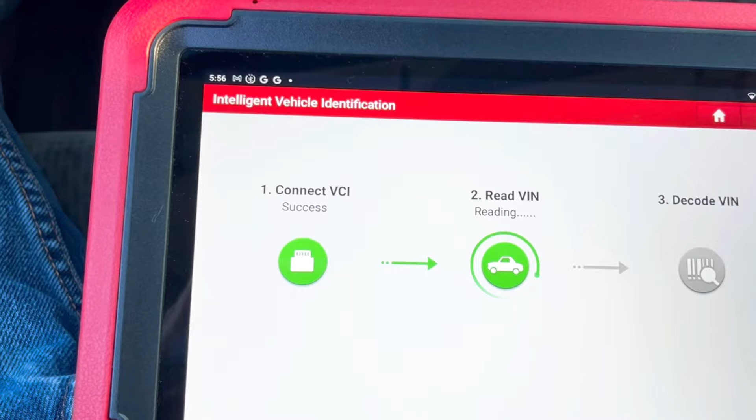Welcome back. I think I got an interesting one here. It's like the end of the day, but it's my neighbor's car, actually they flagged me down. They got a F-150 here, and it's having some drivability issues. So we're just gonna pull some codes real quick. What I have in here is it just randomly started running rough, I guess. I've never seen this car before, I've never worked on it personally.

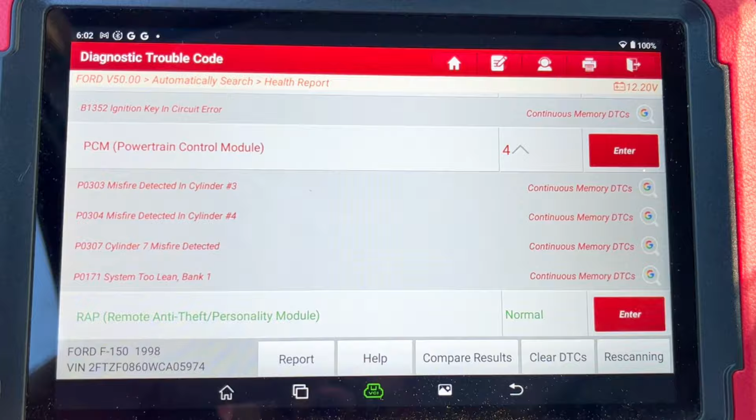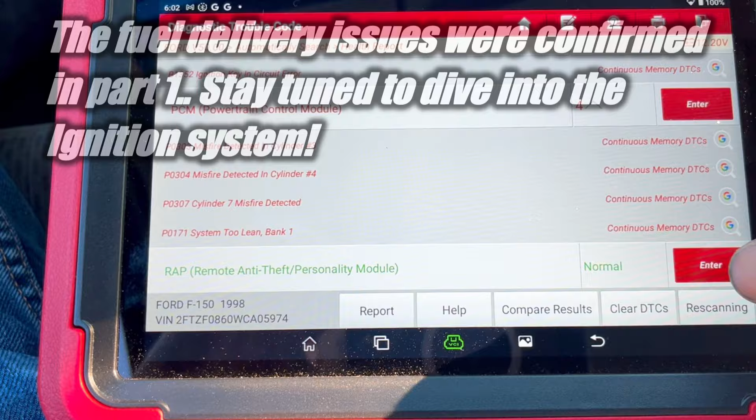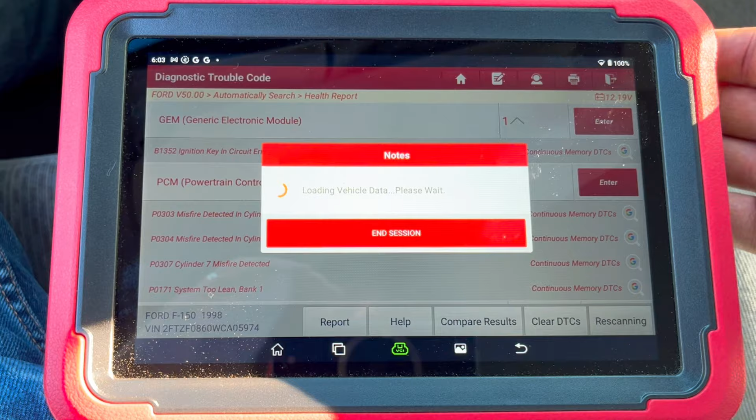Okay, so we got a system lean on bank one, and got misfire codes for 3 cylinders. So that sounds about right with what they were talking about. I think that's the only one. In the gem, there's an ignition key in circuit error, I'm not gonna worry about that right now. But I mean, what it looks like to me is, I don't know, maybe an intake leak on that side, or it's running lean. So I wouldn't put it past it. These engines are known for that.

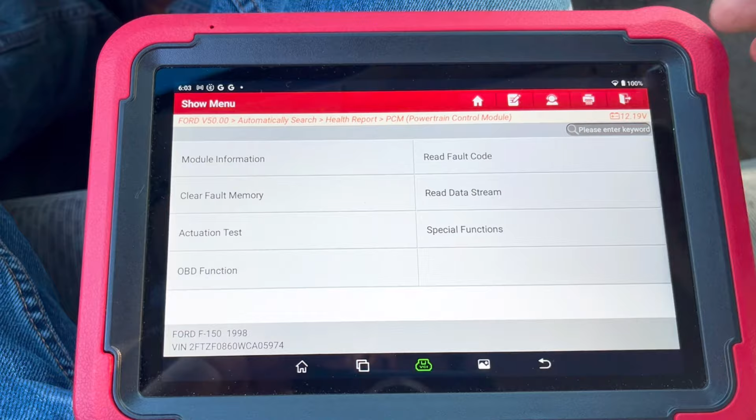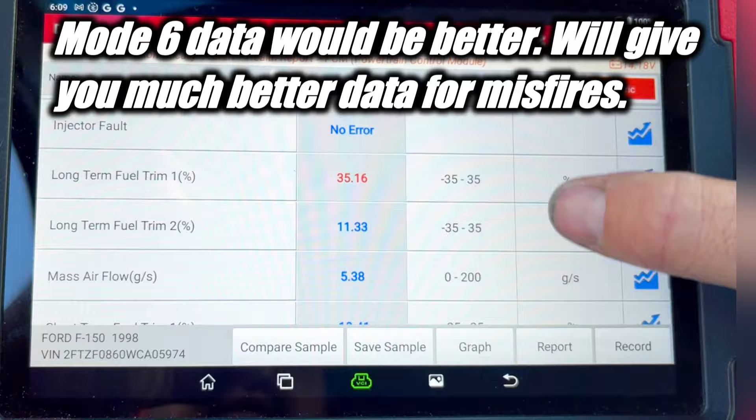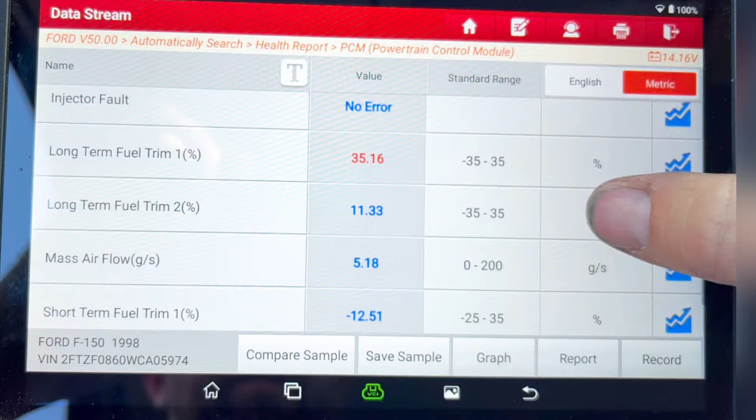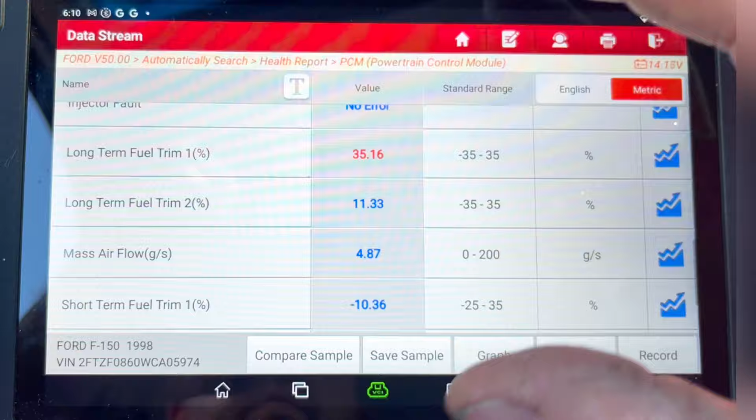So let's go to read the data stream. I just wanted to see the fuel trims, see if any injectors are throwing some type of... I don't think that's a misfire counter. I don't know. Short term on bank one, and then long term on bank one is real bad. So we're pretty lean here. If you want to add the long term and the short term for that bank together, we're riding right around 30, so we're lean. We're real lean on that cylinder, or on that bank. So let's get on this test drive and then see what we can see.

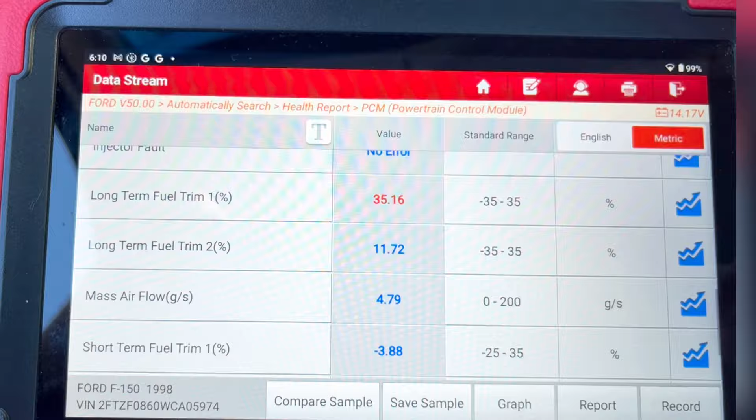So I just got back from that test drive, and that thing runs horrible. I think there's a couple issues going on here. For one, I can smell fuel pretty strong. I'm thinking we might have like an evap leak somewhere, but also we got misfires on those 3 cylinders, and I'm just trying to think, they said it went out all at once. So this particular 4.6 engine, it's got a coil pack on each side of each bank.

I'm thinking one of them failed. So yeah, I think I'm gonna just get a secondary pattern on the coils to see if I got some weak spark coming out of them, and then if everything looks good, I'll move on. But this is a quick dirty check just to verify spark. So let's get on that.

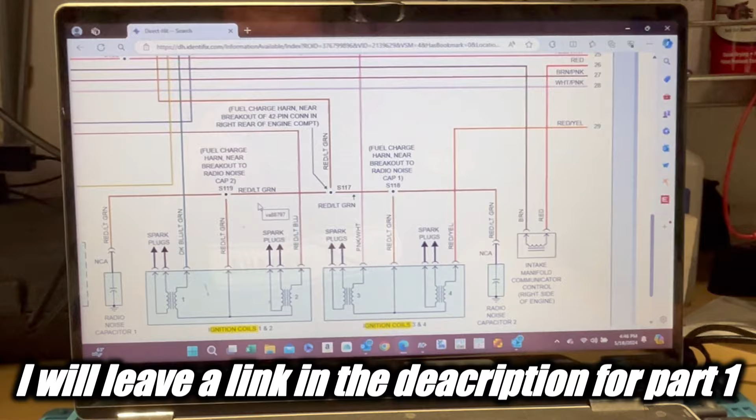Alright, so this is that secondary ignition video I was talking about in my last video. So I just pulled up the diagram, and we got 2 ignition coils here. There's one on each side of the engine, and they're not bank specific. The wires kind of run here and there, from this side of the engine to that side of the engine. We'll get into that in a minute.

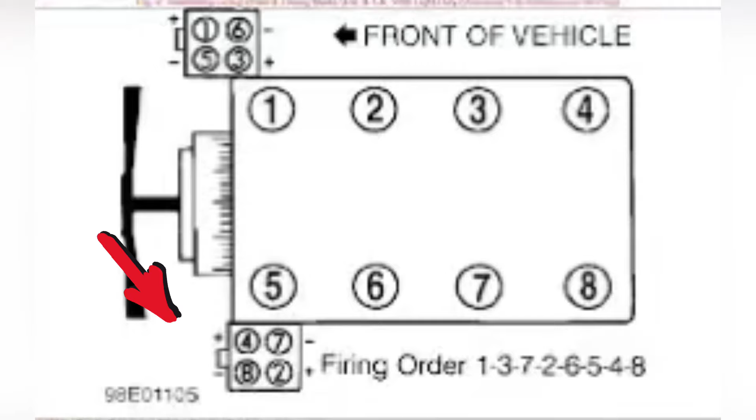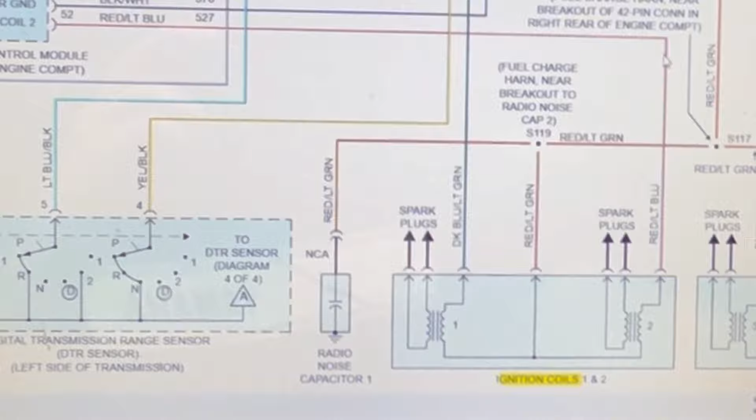So this dark blue, light green wire here, if you follow that up, that's going to go over to ignition coil number 1, that's the control. And then here's for cylinder 2, you're going to have the red, light blue, and it's going to go to ignition coil number 2, and then so on. Same thing with the other side, number 3 and 4, and so on. The pink wire here, pink white goes to control, red yellow goes to control. This red, light green wire right here.

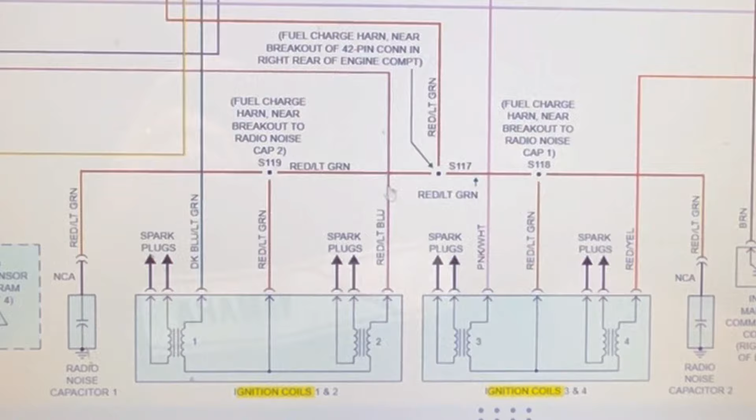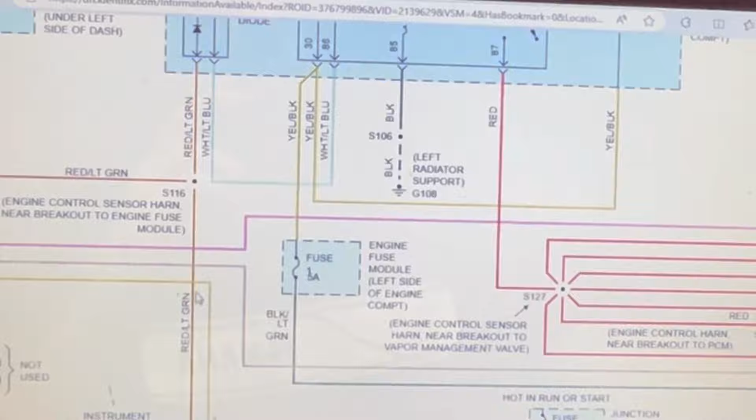It splices in, but if you follow that all the way up, it comes to this fuse number 30, and it's got the PCM power diode on that circuit as well as these radio noise capacitors.

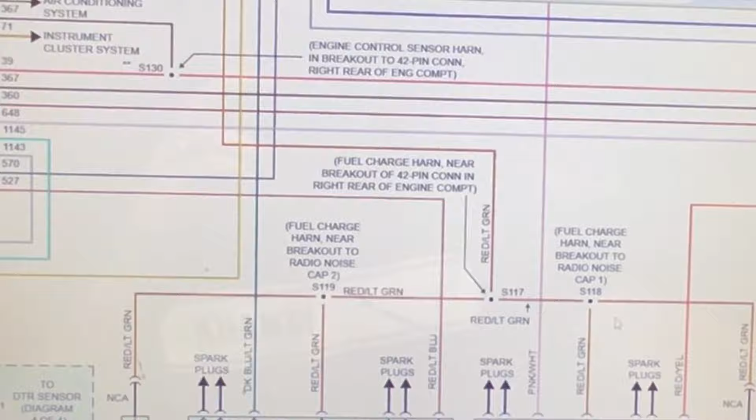I could probably tap into the circuit on either of these. They're pretty exposed, the noise capacitors, but I'm not going to. I want to do as central of a location as possible. You can see it splices off to all these coils. I don't want to be right here, or right here. I want somewhere where I can get a good current ramp, that's just kind of neutral. So somewhere right around this splice point.

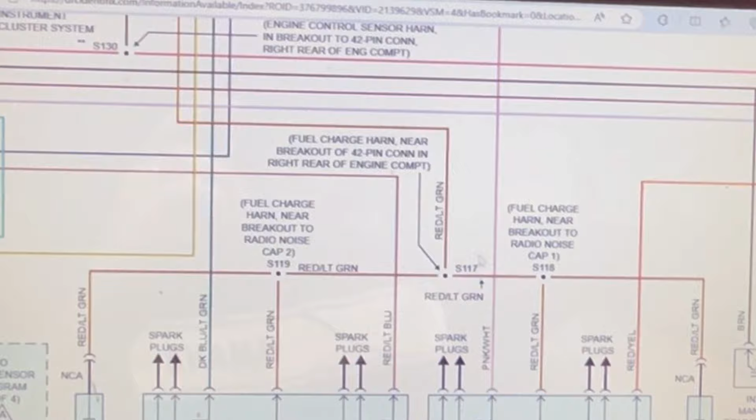This is going to be the right rear of the engine compartment. There's just a big bulkhead connector in there, and I think I saw the wire. We're gonna have to maybe cut open the loom a little bit, but I think we can get a good measurement there.

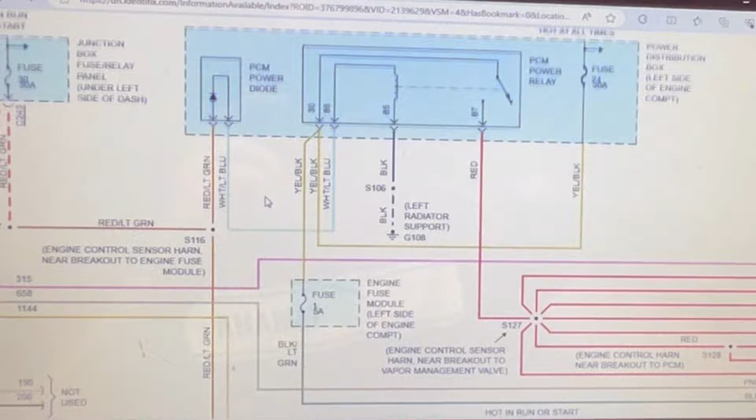I thought about just getting it from this fuse. However, I might try that, that might be the easiest. But there's all this other stuff tied in, like this PCM power diode, and I really wanted something close to the coils so I can get a nice good measurement.

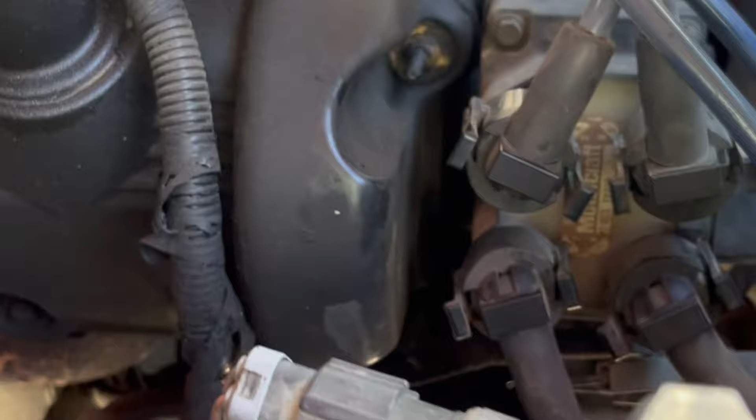So you can see down there, that's one of the coils I was talking about. And then here we go over to the left side here. There's one that's under this air cleaner here. Got a better view over here. Yeah, so you can see it's right under there. Looks just like the other one.

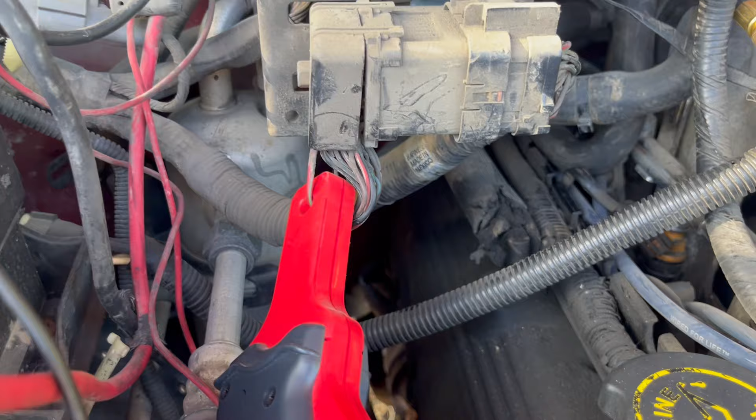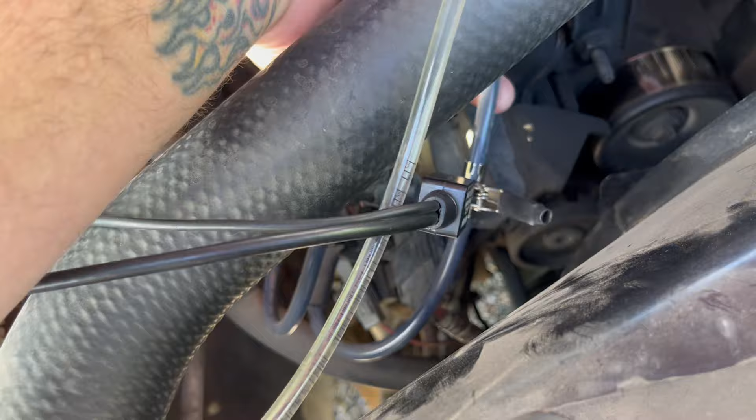Okay, so I just got my current clamp, the low amp clamp, hooked up to the main power feed for these coils. And then I got the secondary hooked up to this number 1 plug wire, and to ground, battery ground.

Okay, so you can see we got some there. All right, you guys, I'm sorry for the massive glare. I'm just gonna save this capture and then go inside and analyze it.

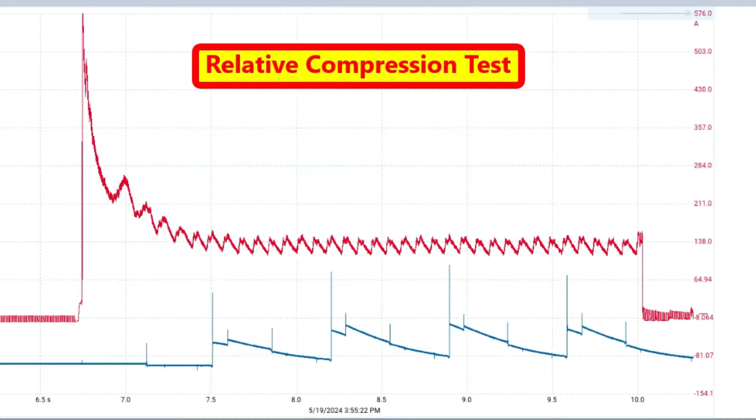So you can see here on this relative compression test, those jagged peaks. I don't know for certain what causes those, but it's definitely not normal. For the most part, you really just want to see a nice clean upward slope on every peak, and anytime you see something like that, it indicates compression loss in that cylinder.

I believe running this vehicle so lean for so long has caused some extensive damage. We don't have complete loss of compression like a dead hole, but there's definitely an issue with cylinder sealing. That would be a whole other separate diagnostic. It'd be a good opportunity to use a pressure sensor in the intake or exhaust, and you could definitely gather some additional data that way.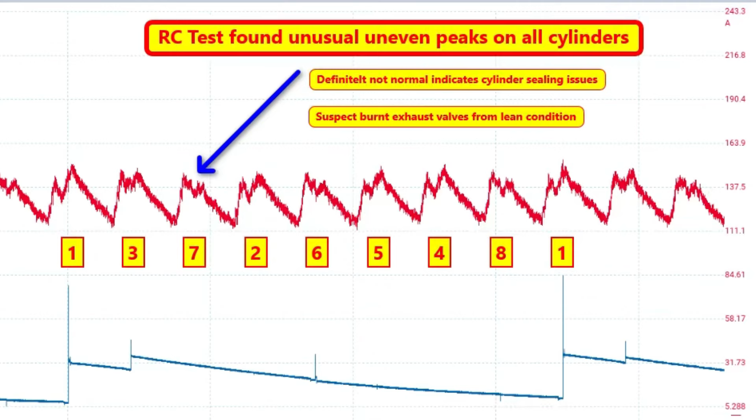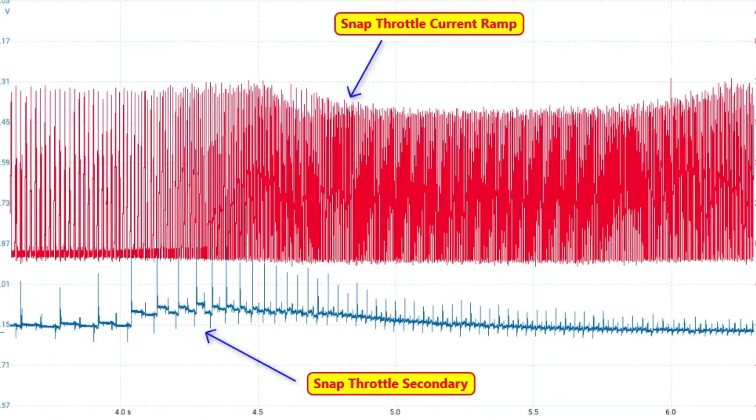So this is just a long capture of the secondary with the current ramps before I zoom in. In the next few slides, you're going to see that, and I'll go into more detail as to what exactly we're seeing and what kind of information it gives us.

Here we are zoomed in, and you can see one ignition event for each cylinder. This is a Ford multi-strike system, and that's why you're going to see two peaks for each current ramp and two firings on the secondary in rapid succession. Ford uses this ignition system primarily just for emissions purposes.

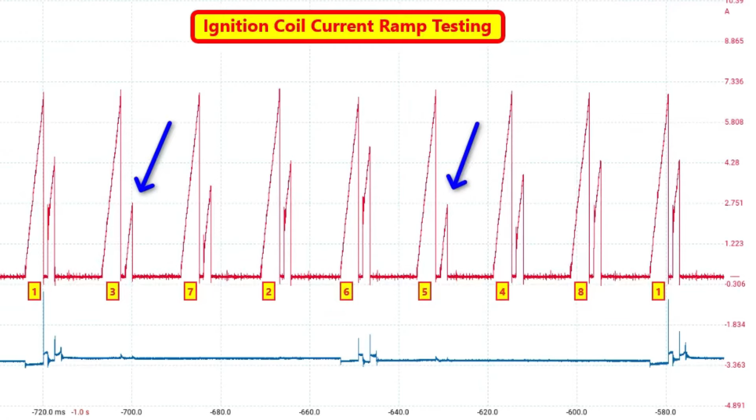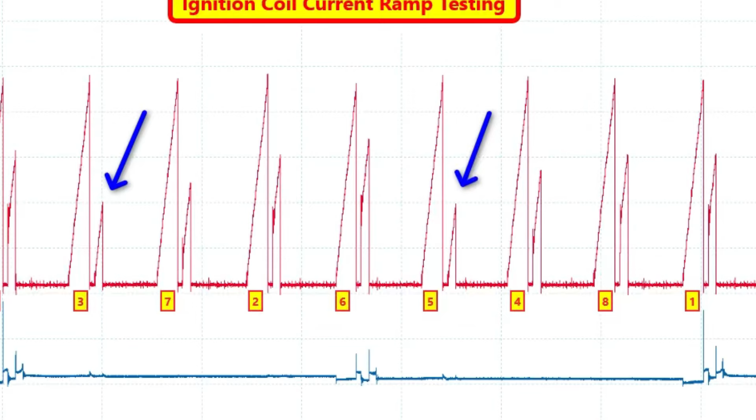But that second peak is actually very telling. You can see where I put those arrows, they're lower, so the current ramp itself is actually different as well. That second current ramp is not going to look like the first one. It's basically going to exhaust the leftover energy in the coil, and you're going to see a sharp upward edge when I zoom in, and that's what you should see.

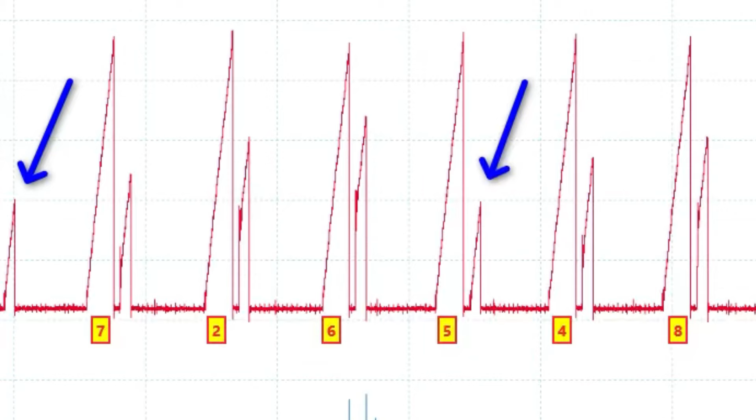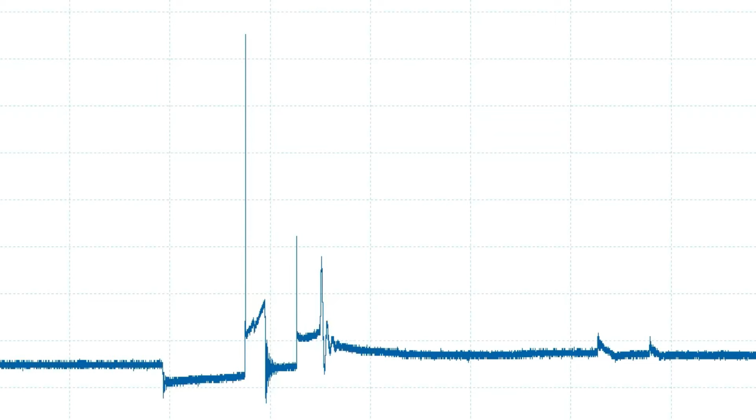Let's take a closer look at these secondary ignition patterns. You can see right after the KV line, or firing line, that burn line doesn't look good. You notice that sharp upward tick, that indicates we're running lean. If you saw part one of this video, that's not going to be a surprise to you. We've already verified a weak fuel pump, but there's a lot more information we can get from these patterns as we zoom in and fluctuate engine speed.

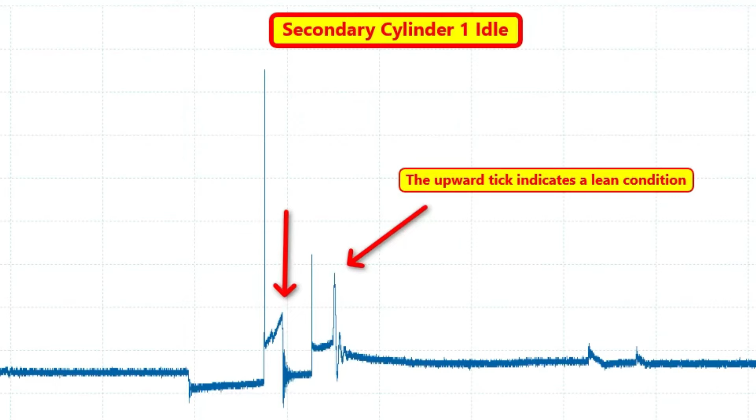You're going to notice a big difference in the secondary ignition. Anytime you have a situation where you're putting that engine under heavy load, it's putting those coils to work. And if they don't have the ability to create the required energy to properly and efficiently run that engine, you're going to have issues, and this is where you're going to see it.

When it comes to diagnostics, this is also where the scope shines. There's no other test that's going to allow you to visually see this electricity in action, if you will. There's definitely other methods for doing this without a scope. However, you're not going to see this kind of detail, and you're not going to get this amount of data so quick.

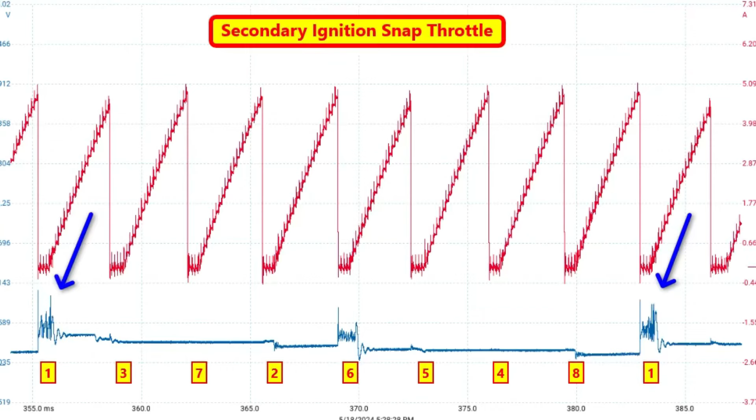Besides setup, it took me just a couple minutes to save this pattern. Now I'm going to zoom in so we can take a closer look at the hash you see in that pattern.

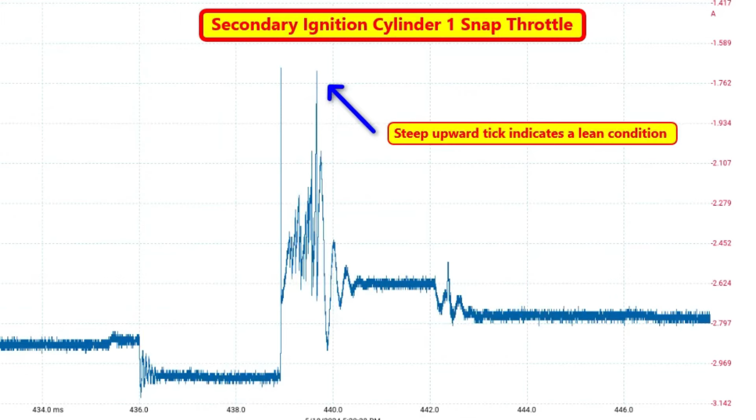Not only do we have that sharp upward tick indicating a lean condition, there's a massive amount of hash all throughout that pattern. A good way to decipher whether you have an issue in-cylinder or outside the cylinder when it comes to the ignition is by just cutting that pattern in half. You can see I put a divider in there, so anything to the left is ignition issues being caused outside the cylinder, and anything to the right is in-cylinder.

With that being said, we got both. So like I said, this vehicle's in rough condition. The suspected secondary issues, they're going to be confirmed to the left, and then the already confirmed lean condition on the right, as well as that turbulence, that really indicates a cylinder sealing issue.

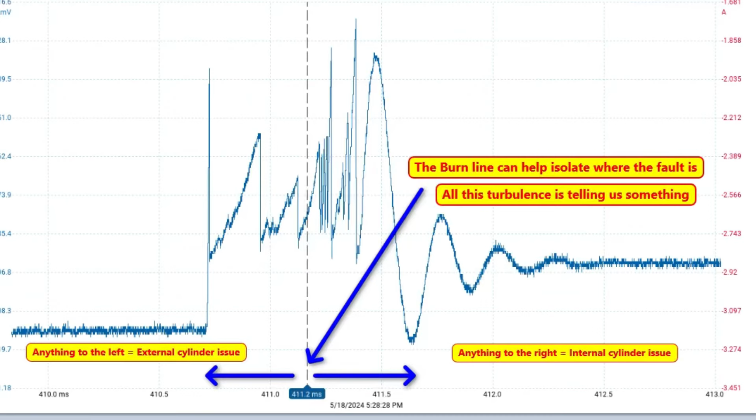As it goes through its 4 strokes, if it's not sealing, there's going to be turbulence because it's sucking air in, it's exhausting air, it's trying to compress air. We've got spark and fuel going in there all at the same time, and if everything's not timed just perfectly, that cylinder is not going to operate properly. And you know, this can be caused many different ways.

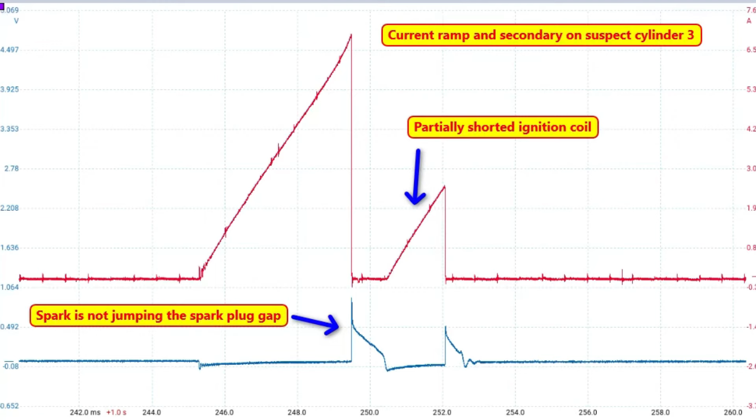If you're gunning it, trying to pass somebody, you're really going to be pushing those coils to the limit. So just sitting here at idle on cylinder number 3, there should be no issue for that coil and its ability to produce the required amperage.

This is just a closer look at that same pattern. You can see the steep downward slope. That, once again, indicates that spark is not jumping the gap. There's high resistance in that secondary circuit somewhere.

When I went to go visually inspect that cylinder, I went to go remove the spark plug wire, and it wasn't even attached to the plug, barely. So bingo, right? Found the issue. There's our high resistance. However, that entire plug well was just full of fuel, and honestly, it's a miracle the car didn't light on fire.

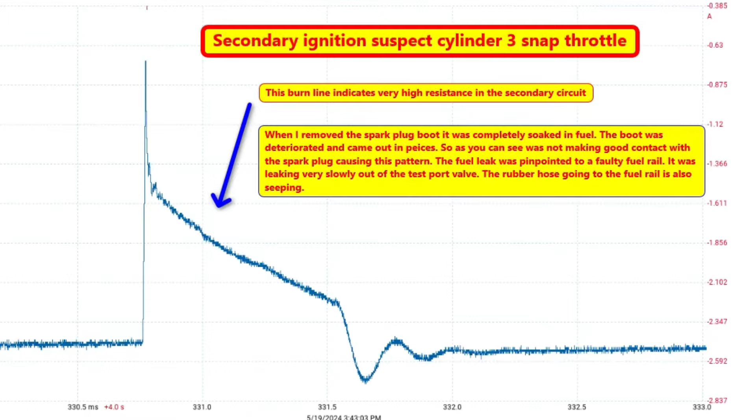The rubber on the boot that goes around the porcelain on the plug was completely expanded and deteriorated. So you can see this is the plug wire for cylinder number 3, and when I went to go remove it, it just disintegrated, or just pulled right off there.

It was oil soaked, and you can see it's pretty swollen, and a piece of it appears to be missing. It probably stuck on the plug, a little connector that I can't think of what it's called, but it sits up in there, and you put the wire on and it snaps in place. Well, that's no longer part of this, so that probably explains that pattern we're getting.

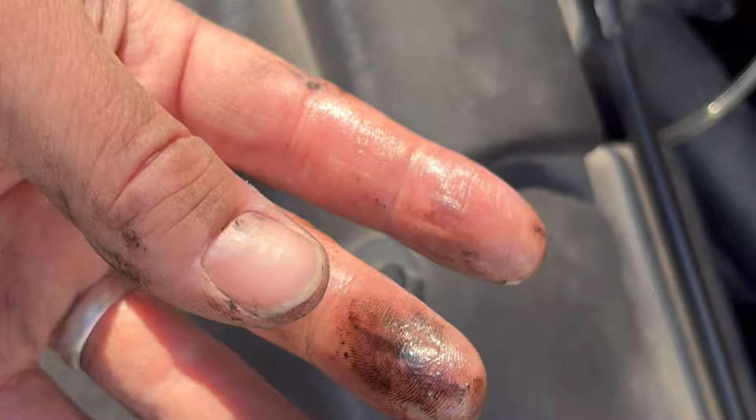So that's actually not oil, that is fuel. And I don't know if you guys remember, that might have been in the last video, part 1, right under this, on the test port there, I don't know if I could see it.

There you go, you can see that little gold or brass fitting there. That's the test port. It's dripping, and it dripped straight into that hole. Cylinder number 4 is right behind it, so I'm gonna guess it dripped in that hole too.

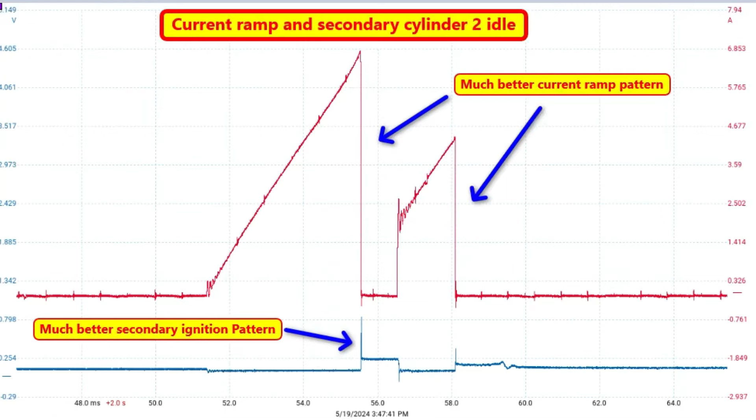Let's look at what the cylinder looks like under load now. Once again, testing these things under different conditions is absolutely necessary. You could go wire to wire to wire and see this and say, oh well, we're good. It's just sitting there idling in the shop, move on to the next cylinder, and you could miss some important data.

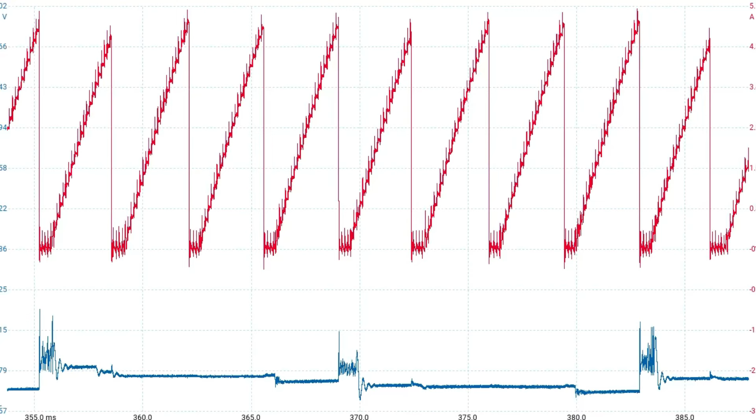If you look at that burn line, it's definitely not normal. We definitely have issues there. If you split that in half, once again, we got issues outside the cylinder, and we got a lot of turbulence in that cylinder.

Zooming in even further, this is the worst pattern I've got so far. If you look at that spark line or KV line, it's incredibly low. I really should have been better about getting some cursors on there to show you guys the actual measurements, but on a pattern like this, you really don't need to. It's pretty obvious you got issues there.

Overall, this truck is just in pretty rough condition. And unfortunately, this is the kind of stuff that happens when you drive your car into the ground. When that check engine light starts flashing, that means stop the car and go to a mechanic immediately.

I really feel like the extent of damage could have been avoided by regular maintenance. When the system started running lean, the fuel pump got weak. It may have been the issue, and the only issue at the time. I don't know, I don't have a great history with this car, but when you run lean, you put an enormous amount of stress on the ignition system, and in the long run it'll melt your cat. It'll burn your valves up, or cause other cylinder damage.

It's like, what came first, the chicken or the egg? The fuel pump or the ignition issue? I'm gonna say the fuel pump. That's my best guess.

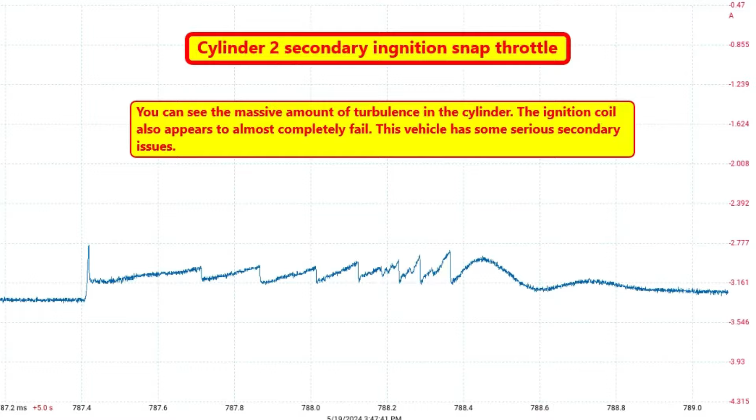Hopefully you guys watched part one so you could get an idea of what I was talking about. I kept referencing a lean condition. I think my biggest thing I'd want you to take away from all this is the ability to decipher different issues. I think that's so important in misfire diagnostics because you could have a car roll in that runs like crap, like this one, and they've been running it like crap for a long time.

A new set of plugs and wires and coils and all that, it sounds great. The client's thinking, oh well, I'm getting a full tune-up, it's going to run great. But if you don't do your due diligence and verify the issue and verify there's no more issues, then you're not going to have a happy client. And if this is your own car, well, that money's coming out of your pocket. It didn't fix anything.

I really enjoy this type of diagnostics. It's honestly what keeps me going. I can't stand wrenching, heavy line work, and this type of stuff just fascinates me.

Hopefully you guys took something away from this, and hopefully this video can excite someone else out there to want to dive deeper. If you don't have a scope, there's a lot of affordable options to get you into it. I was using a Hantek for like a year and a half before I got my Pico, and you'd be surprised with what you could see with any scope. You'd be surprised what you'll find when you dig deeper in any type of diagnostics.